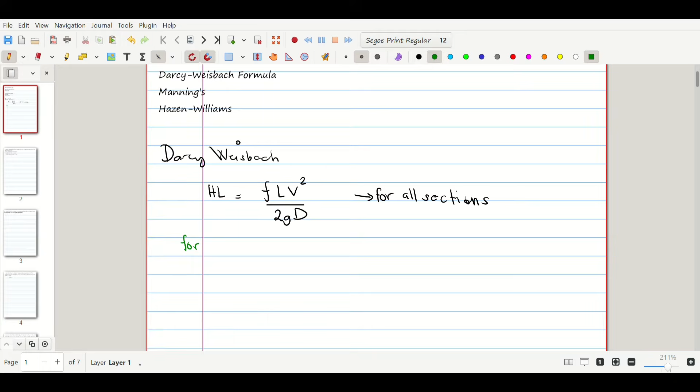We have pipes, and their sections vary — it could be circle, rectangle, triangle, etc. So for all sections, that's what you use. For circular pipes, the formula to use is: head loss is equal to 0.0826 FL Q squared over D raised to 5. This is what you use for circular sections. You might wonder why there are two formulas — one for all sections and one for circular sections. It's because in hydraulics, or in real life in general, pipes are usually circular, so sometimes this is the one used.

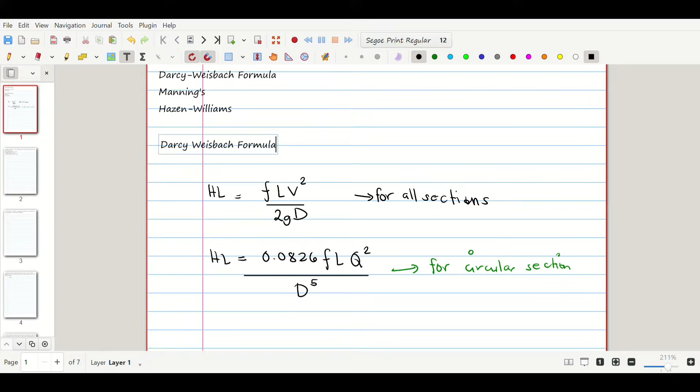For Manning's formula, to solve for head loss, the formula to use is: head loss is equal to 6.35 n squared times L V squared over D raised to 4/3. This is what we use for all sections.

Next, compared to the all-sections formula, there's also one for circular sections under Manning's: 10.29 n squared times L Q squared over D raised to 16 over 5. This is the formula for circular sections.

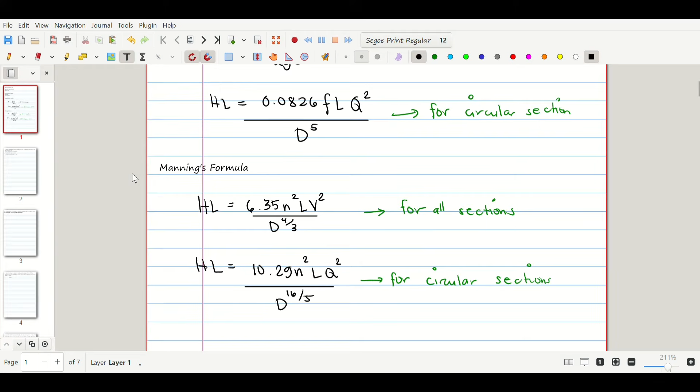And lastly, for the Hazen-Williams formula, let's not include the all-sections version — let's go straight to the one formula. For Hazen-Williams, the formula we use, or HL, our head loss, is equal to 10.64 L Q raised to 1.85 over C raised to 1.85, multiplied by D raised to 4.87.

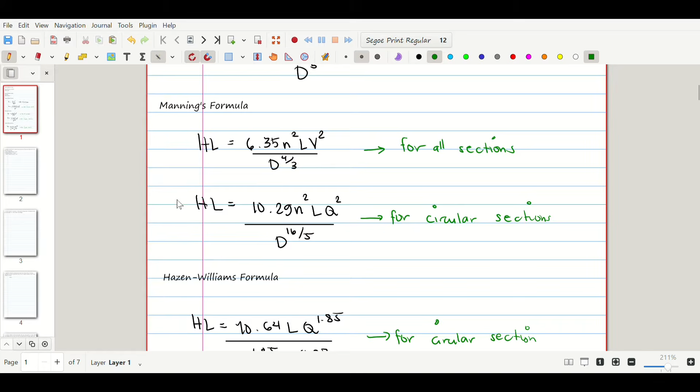So, as I've mentioned, this FLV squared over 2GD is for all sections. And the one below it is for circular sections. Actually, we can derive that to get the one for circular sections, so let's do that now.

So, HL, or our head loss, is equal to FLV squared over 2 times GD.

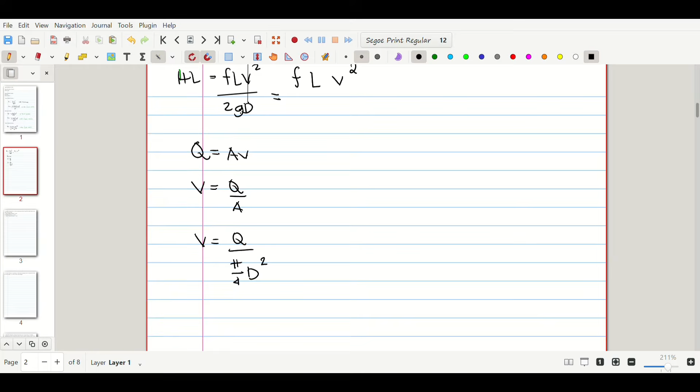And then V is equal to Q over A, which is the area, since that's a circle, we can express it in terms of diameter. So it becomes pi over 4 d squared. So this will also become 4Q over pi d squared, which is equal to V.

And as you can see, we can substitute that in. Let's substitute it, replacing V squared. So FL, the V will be 4Q over pi d squared, over 2.

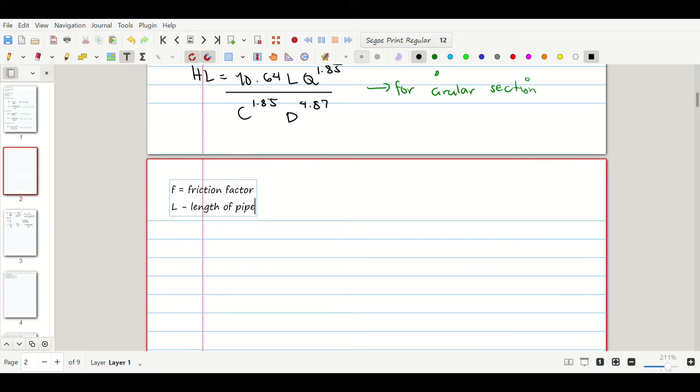Okay, you probably already know that. So V is your velocity, velocity of the fluid. Then you have the G, so gravity, acceleration due to gravity. Should I write it down? Sure, let's write it - acceleration due to gravity. And D is the diameter.

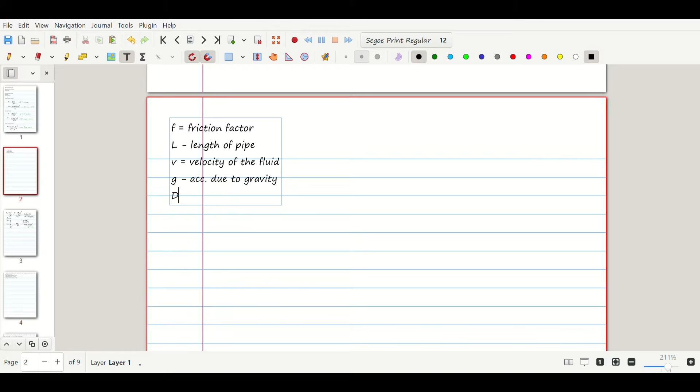There's more. L, that's length. D is diameter. Q, discharge. Okay, Q, discharge. So for this equation, for these variables, you already know what they mean, right?

So as you substitute data, make sure your units are consistent. Okay, so for this one, even though these are empirical formulas, we have to be sure our units are consistent so we avoid errors. Okay, so for Manning's, as you can see, they use similar variables - L, V, D, L, Q, right?

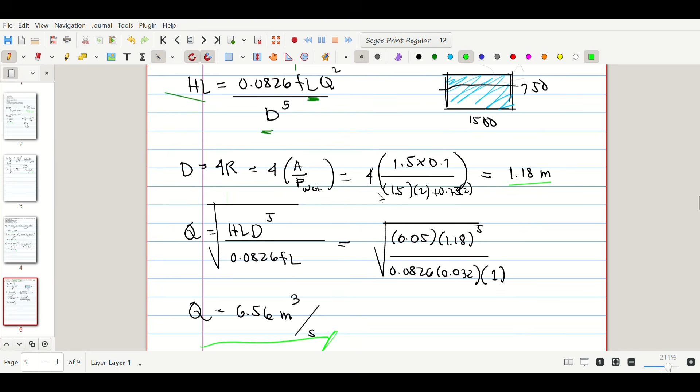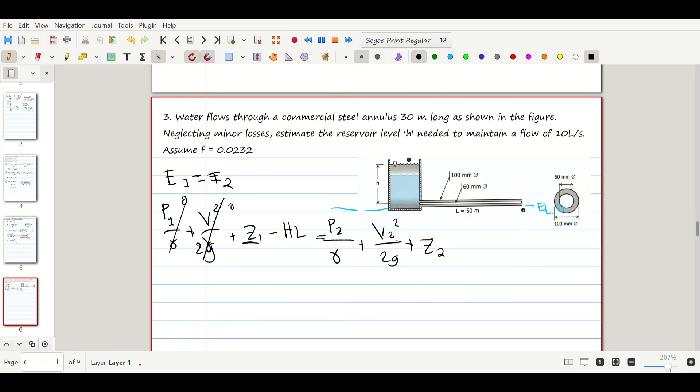To find the elevation head, we need a reference point. So let's reference it at point 2. That's where our zero elevation is.

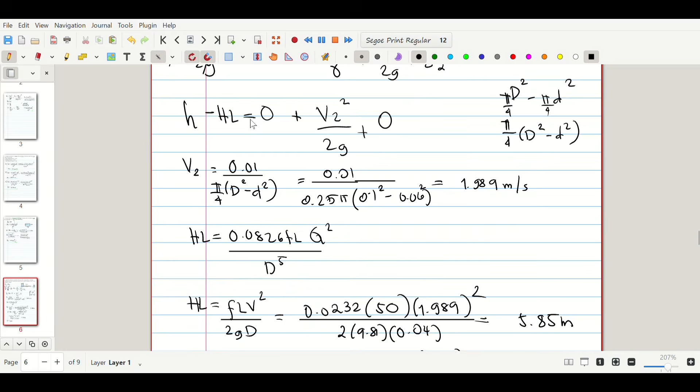So this one equals - the V is squared - 0.0232 times 50 times 1.989 squared, over 2 times 9.81 times 0.04. So that gives 5.85 meters. Okay, so this we can now place there.

Meaning H is equal to the head loss. So moving the negative to the other side, plus V squared over 2G, so head loss is...

5.85 plus 1.989 squared over 2 times 9.81, giving us 6.05 meters, and yes, that's the final answer.

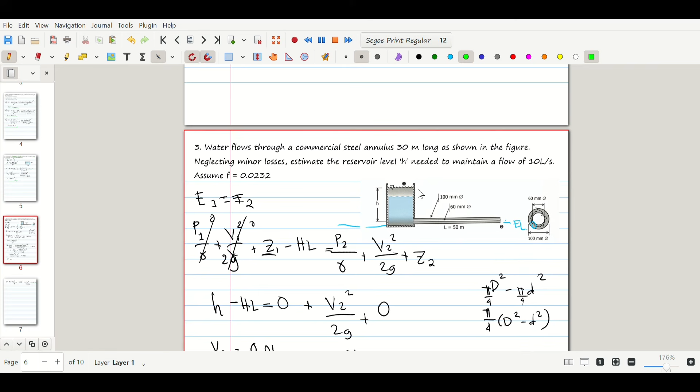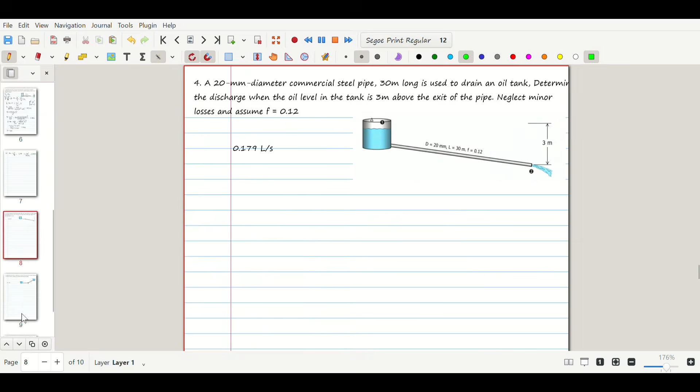This has a continuation - we will be solving 3 more problems. Actually, 3. One, two, three - 3 more problems. There.